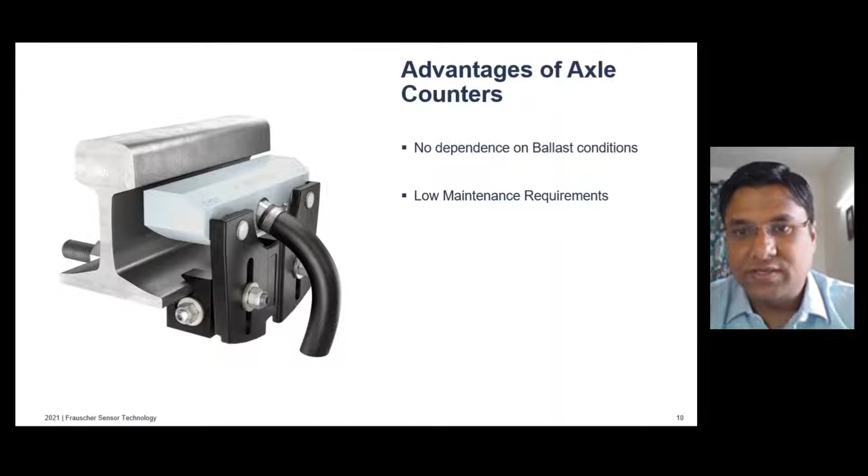The most important thing is that there is no dependence on ballast conditions in the case of axle counter sensors. The maintenance requirements are lower. This is an established fact, and there are a lot of reports available for anyone interested. Overall, the life cycle costs are lower for axle counters when we do a complete life cost analysis.

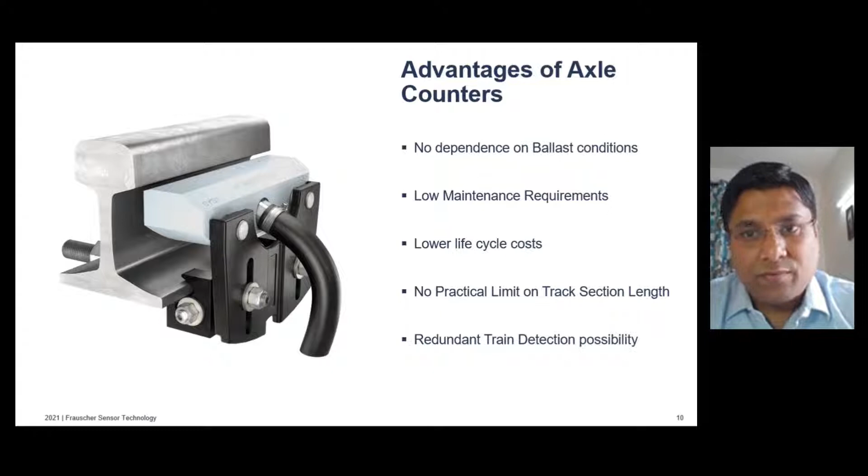There is no practical limit on track section length. Track circuits, the alternative train detection technology, have limited track section length, but with axle counters we don't have that kind of limitation. Also, it is possible to have redundant train detection with axle counters.

Now coming to the advanced train detection system, the Frauscher Advanced Axle Counter, FAdC. The theme on which FADC has been built is more relevant information with lesser effort. I will show you in the coming slides how this has been designed to reduce the effort required to gather relevant information.

The real test of any component is when it is in real conditions and proves its mettle for a long period of time in harsh environments. Our wheel sensors, RSR 180, 123, 110, have all proven their mettle in harsh environments. These are images from across the world, from our projects in industrial mining and in cold conditions as well.

The sensor shown in the image is IP68, which is a key criteria for any outdoor device because it has to be robust. It sits on the track bed and is clamped to the rail, so there is no drilling in the rail. This gives the sensor the required strength and robustness to work in outdoor environments where trains move fast over it.

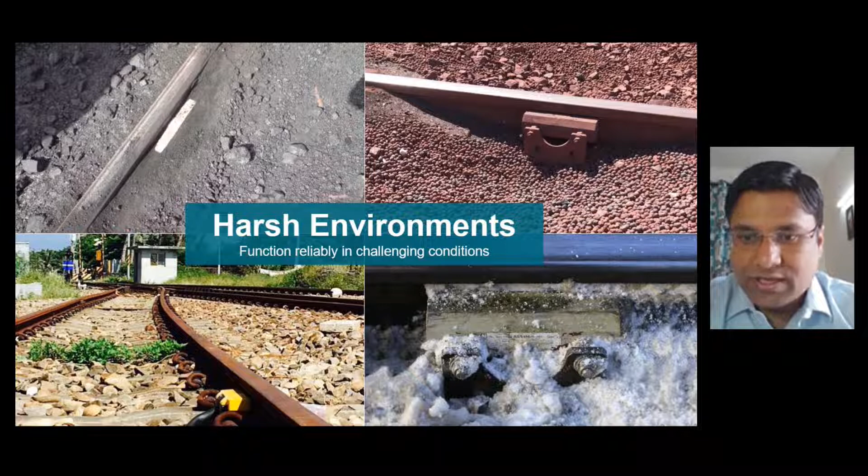I have not shared images for this to ensure we complete in time, but in Mumbai projects, Mumbai suburban, our sensors are working fine even in flooded conditions. This shows this is a key requirement when we talk about sensors and external devices.

Moving forward, FADC has a number of case studies we can share from Indian and international projects. It offers a number of advantages. The key thing is that it is vital and fail-safe as a system.

It is quick and easy to install, both outdoor and indoor installations are much easier. It operates in harsh environments, a point already covered, and requires low maintenance. When we conduct customer services or trainings and tell them about the maintenance practices for FADC, we are surprised when they tell us it is so simple and minimal. This shows we have put effort into building the system so the end user can operate it easily.

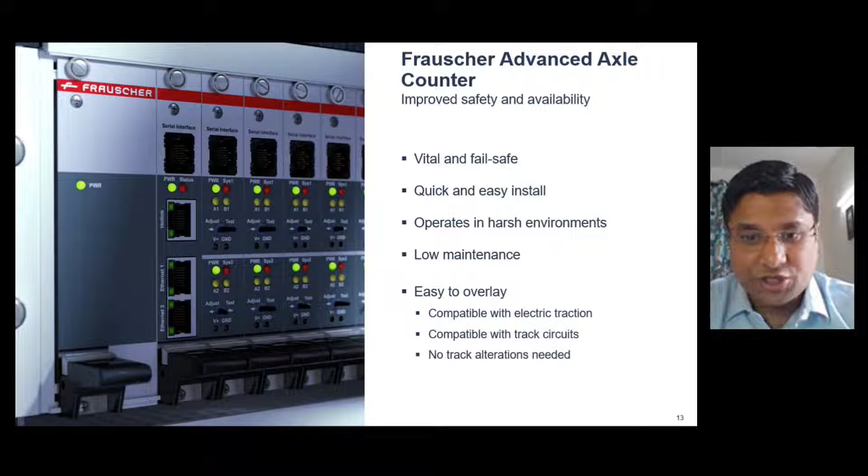This is a design philosophy that India and different projects will see as we move forward, simplifying maintenance practices for the end customer and user. As already covered, it is easy to overlay, and in terms of compatibility, it works with electric traction. There are no interference issues, it can overlay on track circuits, and no track alterations are needed.

Quickly, the advantage FADC offers is that there is no drilling. This has been established in different railway board letters that drilling impacts the track bed and weakens the rail. It also impacts riding comfort for passengers. So drilling is now not a recommended practice, and we offer sensors that are clamped to the rail with no drilling required.

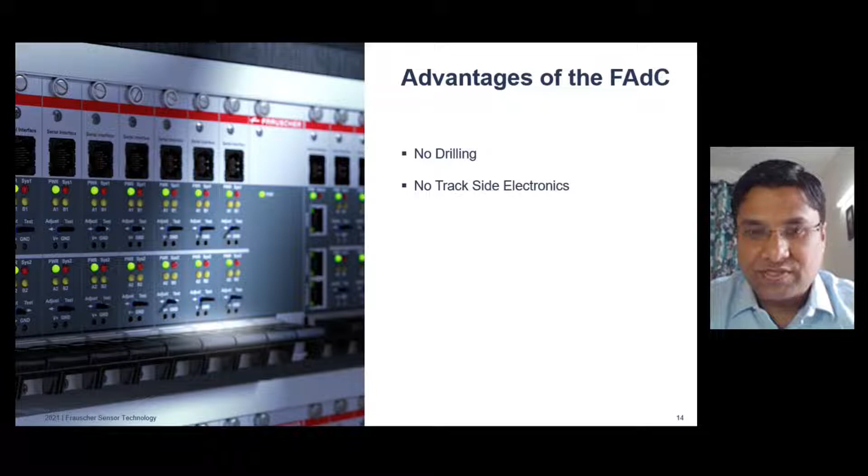Another key philosophy for axle counters, as we move into the next decade, is to reduce trackside electronics. In our case, there is no trackside electronics at all, and all the electronics is available indoors in a protected environment, compared to outdoors where there are chances of different transient surges.

The remote diagnostics capabilities I will cover in the last part of my presentation today, showing how remote diagnostics of the future are being developed. There are flexible design capabilities, and another key feature is the serial interface.

Today in most projects we interface with the higher level system, the interlocking, using relays. But this is not the future. We now have experience implementing numerous projects with serial interface. This trend is already on in Western countries, and even in India, with a lot of experience in dedicated freight corridor projects and other projects where we have proposed and used serial interface.

To put it simply, serial interface avoids the use of relays. You are straight away using our boards, which you can see on the left-hand side, and the ports here, which you can use to directly interface with the interlocking. So this is a game changer.

We are in close talks with proposing this solution for railways as well, and we see the day coming soon where relays will slowly be replaced with all serial interfaces, giving the capability of sending advanced levels of information apart from the regular information. There are other features too, like intelligent redundancy and intelligent functionality, some of which I will cover today.

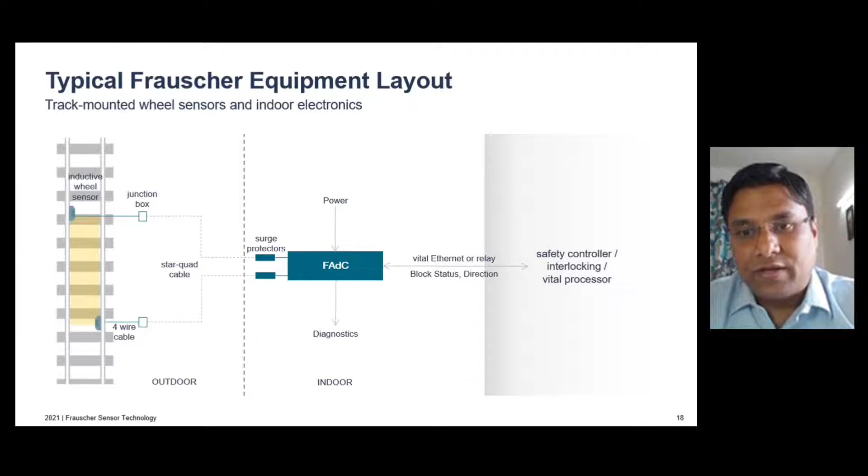As I explained before, with FADC and interlocking on the right hand side, there are multiple options of interfaces available, and we offer Ethernet connectivity in a vital manner in terms of serial interface, using different protocols. I'll touch upon the protocols also as we go ahead.

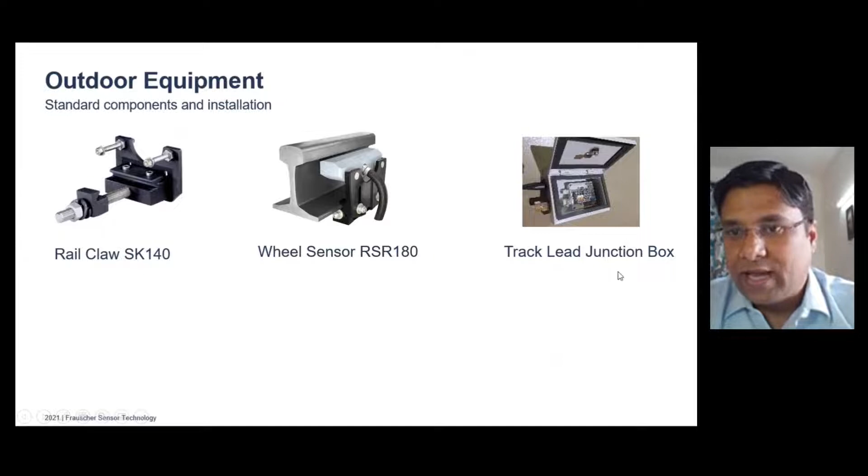And finally, we have the track lead junction box. If I talk about indoor equipment, I will not go into detail of every board, but I'll give you an idea that there are 4 boards that build our entire system: the power supply board, communication board, advanced evaluation board, and input-output board.

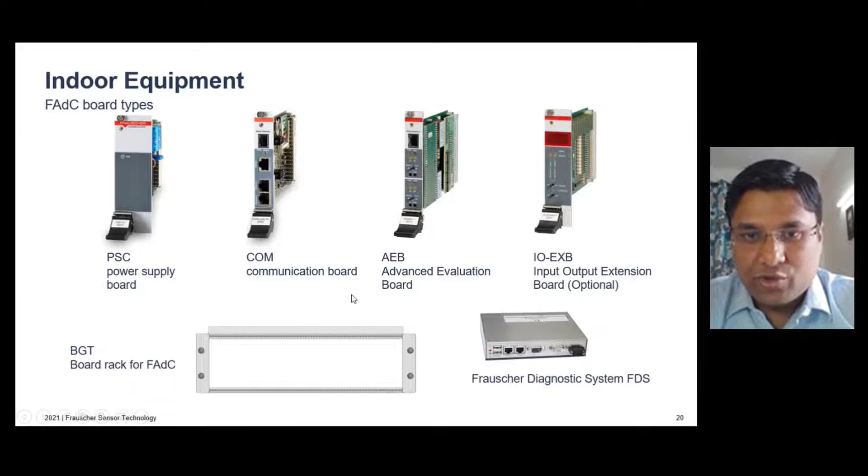All these 4 boards together build the advanced FADC axle counting system, which is running successfully in India in a big way and also across the world. This is the log unit, the FDS, and these are the standard BGTs, the board racks, where we place our boards.

Moving forward, we have to be prepared for the future and the trend that has emerged in the last decade or so, with a lot of successful installations in serial interface, is going digital. The relay has become outdated, and we have to be ready for digitalization. We are ready for that because we have already started with serial interface using the Ethernet ports available on the COM board. This allows data processing, which is not available in the case of relays. It allows data storage, and a lot of capabilities come with data. It also allows cloud-based data management. So this is where we are going towards the future, how to digitalize the data we are acquiring from the field, from the system, and what all we can do with that data.

Also, there is high demand on safety and availability. When we talk about data, we also have to focus on how we can ensure safe and available systems, and use the diagnostic data for preventive maintenance. These are the aspects that, as we go forward, we have to put more focus on in the industry.

To address all this, there is one particular thing I would like to emphasize. There are many things we are doing, but at this stage, I would say the Frauscher Safe Ethernet, it's a protocol allowing free definition of file content. It's an open source protocol which Frauscher has developed, and it's a fail-safe protocol. In the software, you can use this protocol to transmit data up to 200 bytes in vital transmission cycles, and transmission is towards both sides.

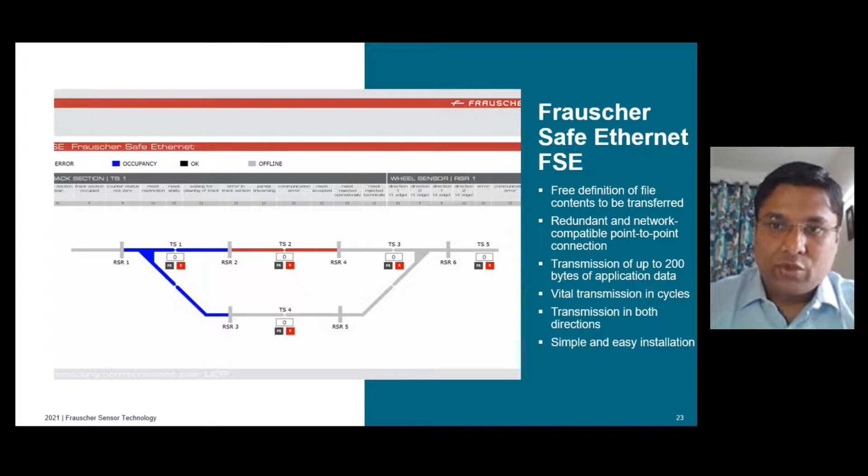So just to make it simple, I would say FSE is a safe Ethernet protocol. It will provide you an easy software interface to interact with any safety critical system. It is already developed, it's open source, and we collaborate with companies to transmit data using the FSE from our system to another safety critical system or interlocking. It allows 200 bytes of information, and it's redundant and network compatible point-to-point connection. So it's a safe Ethernet connection point-to-point, built in redundant mode.

In terms of capabilities, there are a number of capabilities. I'm touching upon two of them in this presentation. The architecture can be seen as centralized, distributed, and mixed. I'll start with the right-hand side, the centralized architecture. Here you can see the depiction of the hardware interface.

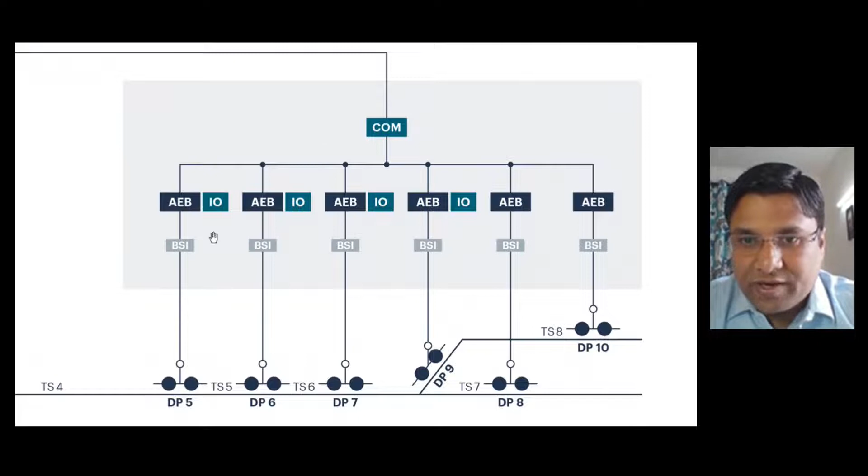We have sensors on the track side in a typical railway layout, maybe a yard or a station. From the sensor, in the same architecture, we have an advanced evaluation board, all internally connected indoors with the communication board. Here, interestingly, we also have one more board, the IO board, input-output board, which provides potential free contacts to cater to the railway requirement of relays, because through the relays we will go to the interlocking. This particular arrangement is the centralized architecture, with one communication board here.

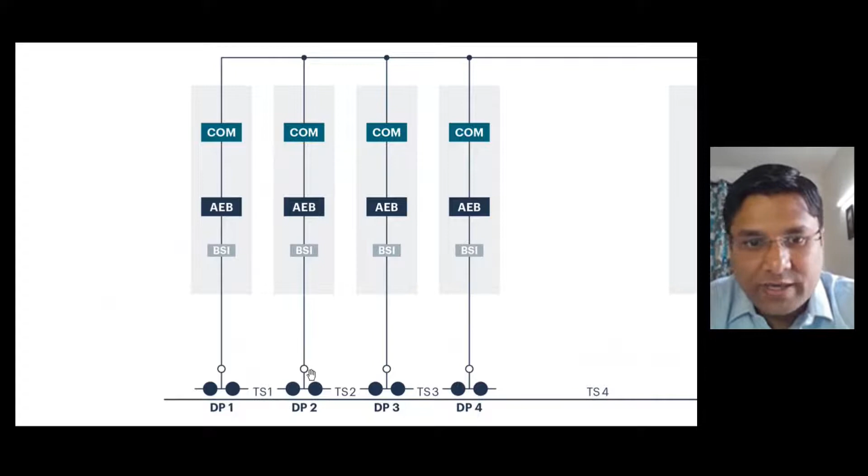Now, if we talk about the decentralized architecture, we can see there are multiple COM boards at different locations. This is one location, shown in light gray, and this is another location. In the diagram they are shown very close, but assume a distance of maybe 8 to 10 kilometers or 5 kilometers in between. These distributed locations can all be connected together in the network, as we are doing in different projects. This allows us to build a modular, flexible architecture, with intelligence. With the help of the COM board, we are able to connect the locations, so we don't have to lay down a lot of cables from one place to another to cover massive distances. We have to utilize the technology and development in optical fibers to transmit the information.

So this is just a glimpse of how flexible the architecture is, and all this together can also be combined, that's why it's written as mixed. On the left side is the distributed depiction, and this one is the centralized depiction.

As I said, in terms of distances, there is no limitation. Why is that possible? Because we have used fiber, and practically there is no distance limitation. It operates and performs as a whole in a single system.

And Ethernet connectivity, because the COM board is through Ethernet, it can be either through copper, fiber, mixed, or even wireless. We are doing some pilot projects where in future we will be doing all these transmissions through wireless mode. So that's another future trend emerging.

Moving forward to the supervisor track sections, another flexible feature which I will cover here. Supervisor track sections allow automatic resetting of track sections in certain situations. There are situations on the field when the track section is faulty, and it's just a specific situation that has arisen, but without the supervisor track sections, it can affect the operation.

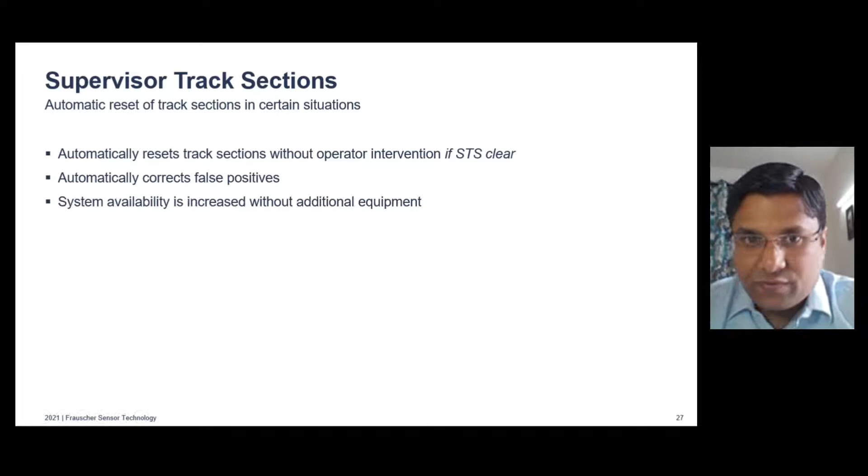So there is a feature that is provided to improve the availability of the system, which is automatically resetting the track section without operator intervention. This is being used across the world. The key point is it automatically corrects false positives. Availability is increased, and safety-wise, it is SIL4 approved in a vital and fail-safe manner.

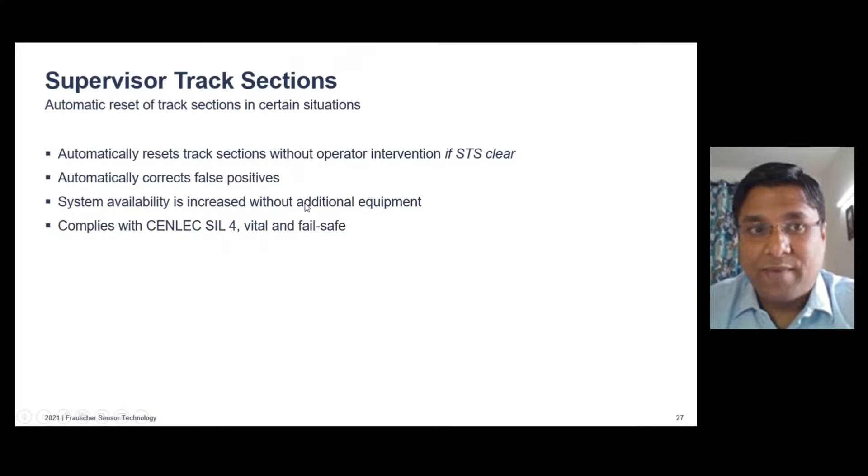We build supervisory track sections. Now, we have the track sections which are built on track section 1, track section 2, but the supervisory track section is built without using any additional hardware. It is built in the software, and we use the virtual supervisory track section to build and provide the availability. There is a lot of detail that we can share.

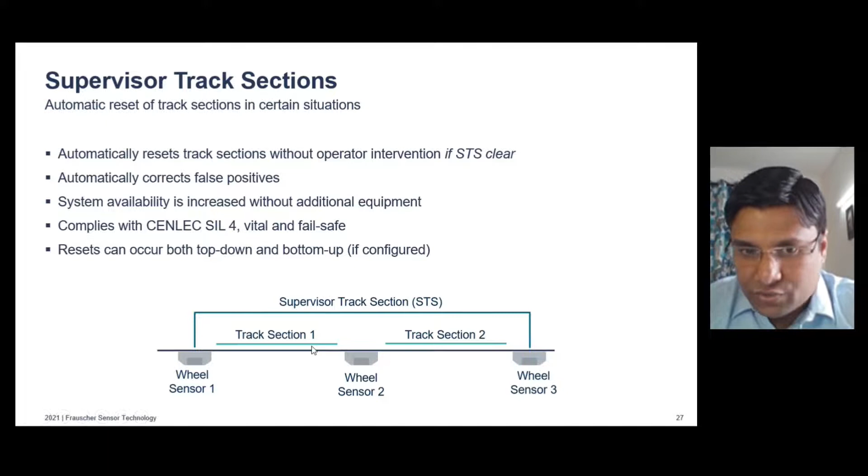At the moment, I would just say that there is a lot of configurational capability that we provide, like the supervisory track section, which we build using the software in a virtual mode without putting additional hardware. That is one way of doing it, but we are not putting any additional hardware and building the STS in the software. Reset can occur both top down and bottom up. Top down would be from the supervisory track section to TS1 and TS2, and bottom up will be the opposite of this.

I'll come to the final part of my presentation now, the diagnostics and monitoring. This is one aspect which we as a region have to focus more on now, because from the end user perspective, from the customer perspective, the diagnostic features are critically important, since these are the features the user has to utilize when the operation is happening.

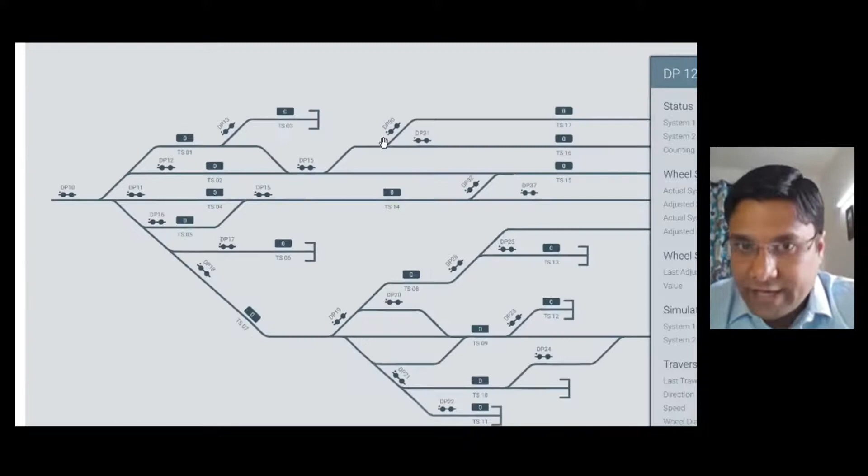So as a supplier, this is a far call that we have taken in building an FDS system, because we are thinking about the end user. And this is the layout that we provide. This is not the interlocking VDU, this is my FDS, Frauscher Diagnostic System, which we provide for every project. Every project will have its own typical layout.

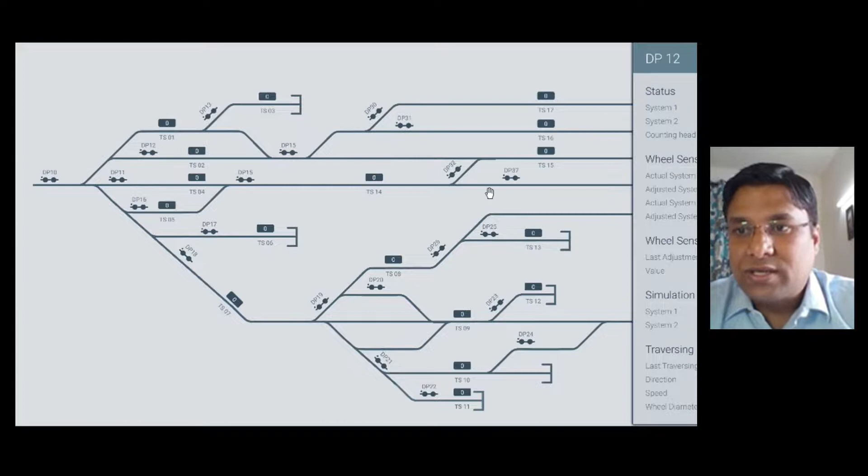Now, what is fancy about this layout? The main thing is that all these objects and entities that you see on the layout, whether it is a detection point, track section, all these entities, you can use the mouse and the click option, and you can click on them to read their statuses. That is point number one.

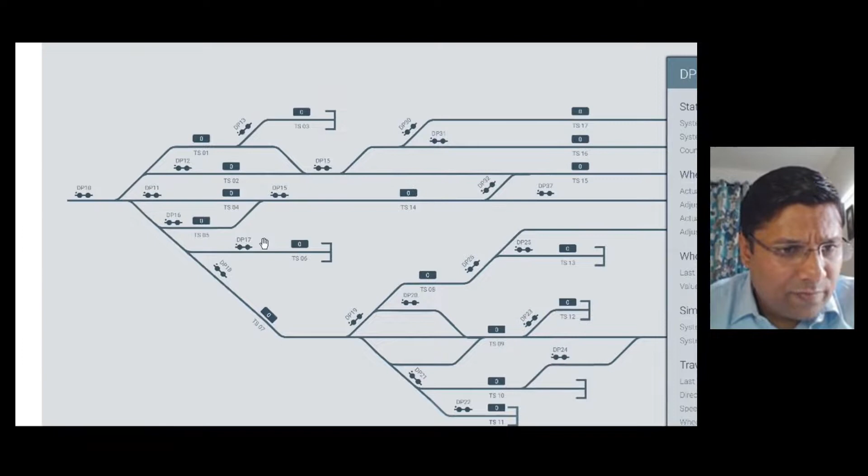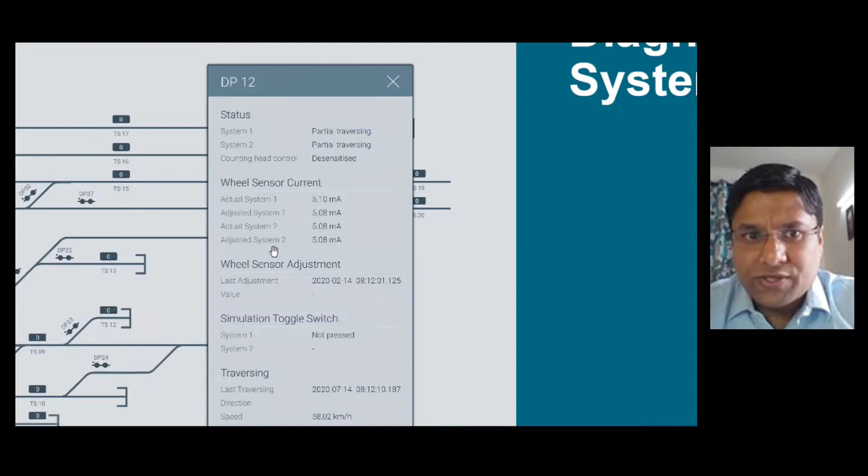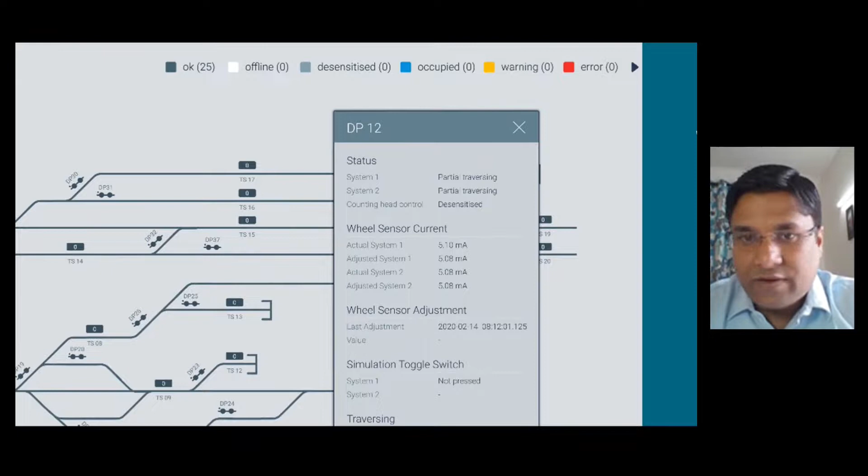So you can see, let's say it has been clicked as detection point 12. If it is blurred, I apologize for that. But DP12, yes, so it has been clicked, and you can see different information. I'm not going into detail of this, but statuses, sensor currents, adjustments, traversal, speed, direction, all this information sitting inside your signal equipment room or maintenance terminal or a centralized location. You are able to access information for the whole layout.

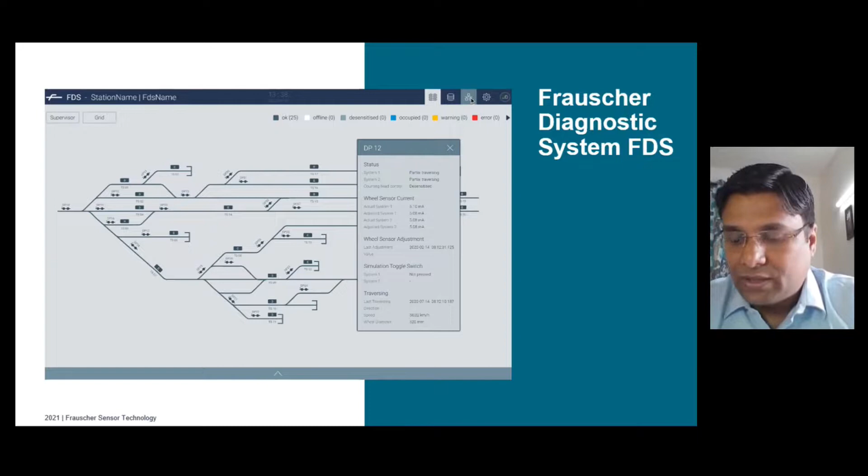This is the future, because as operators, we have to look for systems which are providing such level of diagnostics in their offer.

Let me give you a little more glimpse of FDS. It is advanced diagnostics, not the standard diagnostics. It takes it one level further, providing track layout, logging, and diagnostic features, and it reduces maintenance cost. You don't have to send a person to the field to check the sensor; you can do a lot of diagnostics while sitting indoors.

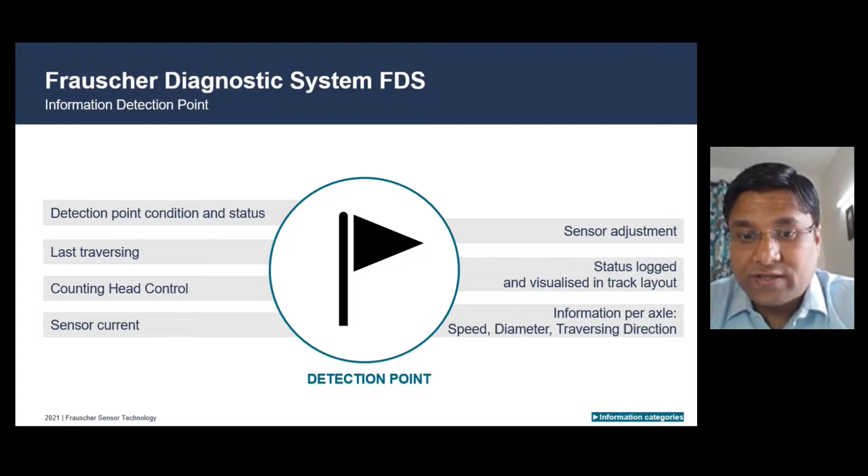We can see there are two particular pieces of information. In this case, it is the detection point, or DP. All this information is available: the speed, status logged and visualized in track layout, sensor adjustment and when it was done, last traversals, status of counting head control, sensor currents, and detection point condition. So you can foresee whether the detection point is okay and understand its status.

On the track section side, from the railways' point of view, this is more critical in terms of the status of the track section as a whole: whether it is waiting for clearing of track, whether it is in reset mode, the number of axle counters, and the status, whether online or offline. All these things about the track section you can also track.

So what I want to say here is that we have to choose diagnostic systems which are comprehensive and go into an advanced level of information exchange. All this is happening using the communication board and Ethernet ports connecting in the network, so anywhere in the network you can get this information.

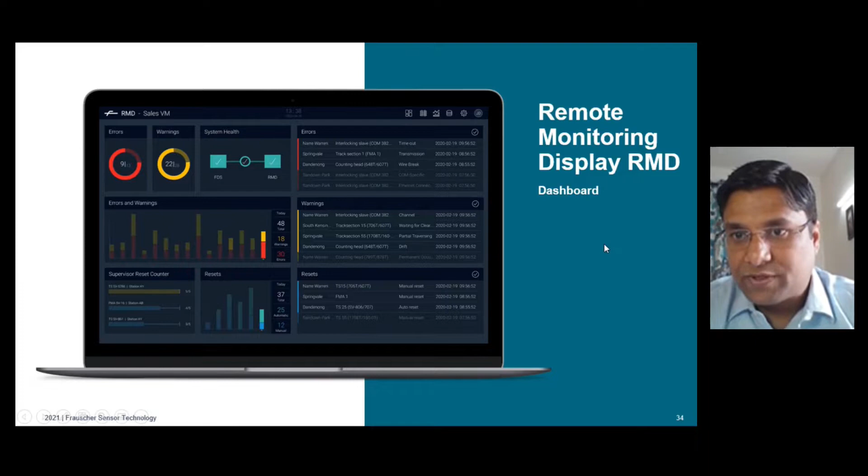Before I go towards the conclusion of my slide, I would also introduce the remote monitoring display, again something we talk about as the future of diagnostics. This RMD is a game-changing moment for us because it gives us a remote monitoring display in a very comprehensive manner. It combines multiple Frauscher diagnostic systems at different locations, and at a centralized location, it gives you a much more advanced level of diagnostic system.

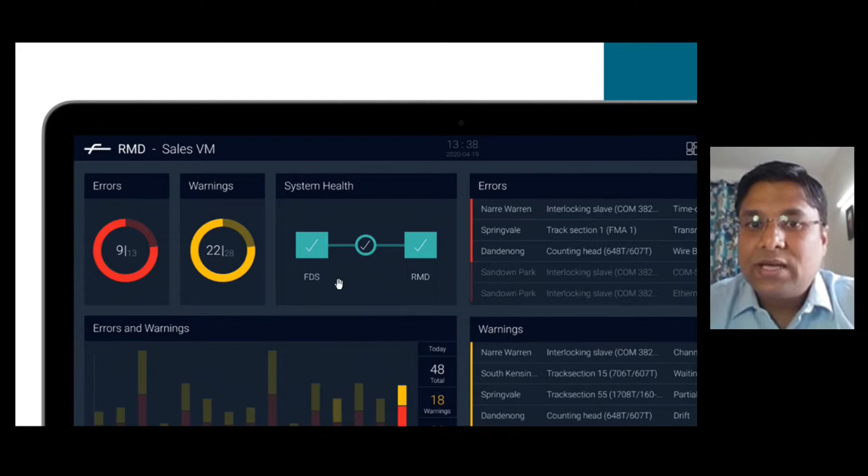It will do the analysis, generate reports, and give you regular emails. Not only that, it will go into an analytical point of view to assess system health, component health, warnings, and errors. There is a lot you can do using the errors, warnings, and resets with the RMD.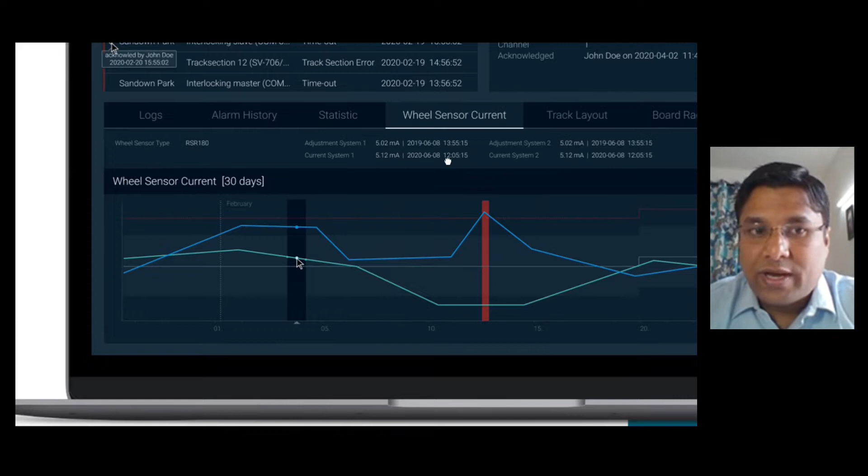As I was saying, it can analyze things—just for an idea—like wheel sensor current over the last 30 days, analyzing how it is varying. It gives you alarm history, statistics, and board racks.

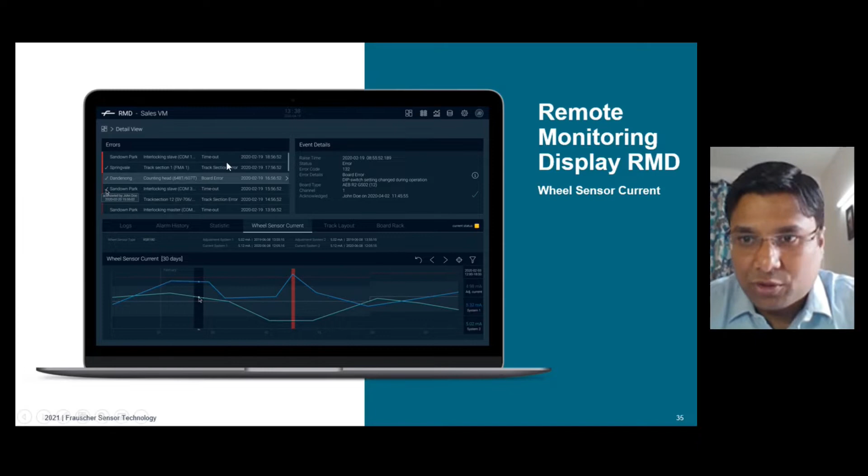We are implementing pilot projects in certain projects in India as well for the RMD, where we are collecting vital data and exhibiting our skills.